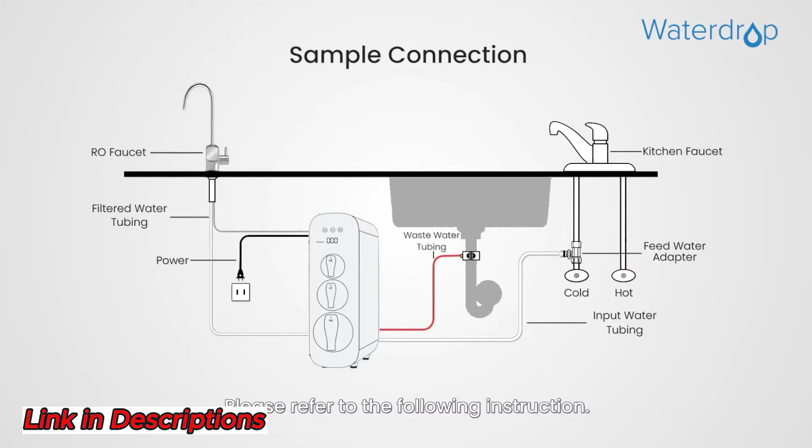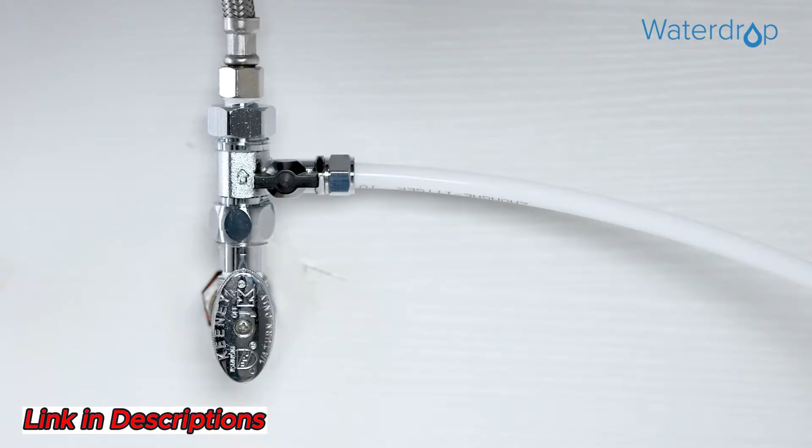Let's start with installing the feed water adapter. We have already connected the input water tubing with the feed water adapter for a smooth and easy installation.

Firstly, shut off the water supply and turn on the kitchen faucet to release the water pressure. Then disconnect the cold water pipe from the cold water supply valve.

Twist the feed water adapter onto the cold water supply valve with its washer and tighten it with an adjustable wrench. If your cold water pipe is 1/2 inch, you need to unscrew the two converters from the feed water adapter first, then twist the feed water adapter onto the cold water supply valve.

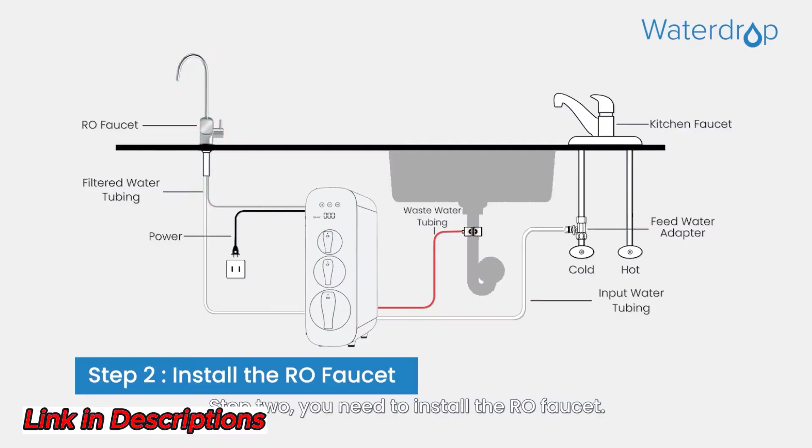At last, twist the cold water pipe with its washer onto the feed water adapter and tighten with an adjustable wrench. Step 2: install the RO faucet.

Firstly, insert the faucet spout into the faucet body. Then insert the faucet stem, power cord, and filtered water tubing into the hole on the countertop. Under the sink, slip on the nut and tighten it up. Next, tear off the protective film of the faucet.

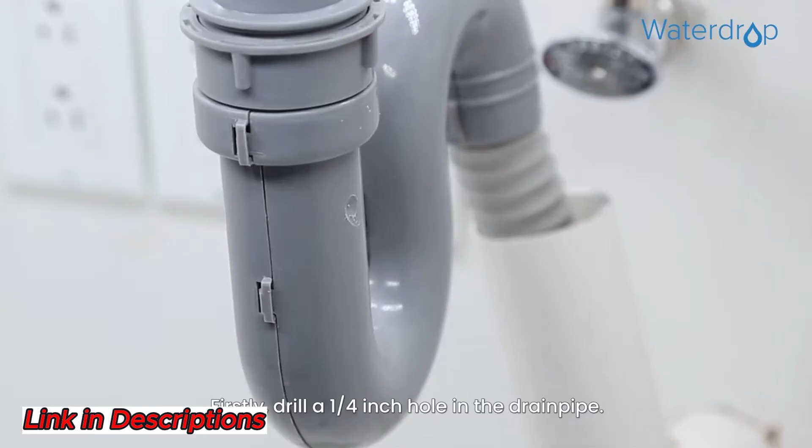Step 3: let's install the drain saddle. Firstly, drill a 1/4 inch hole in the drain pipe. Please don't penetrate the opposite side of the pipe.

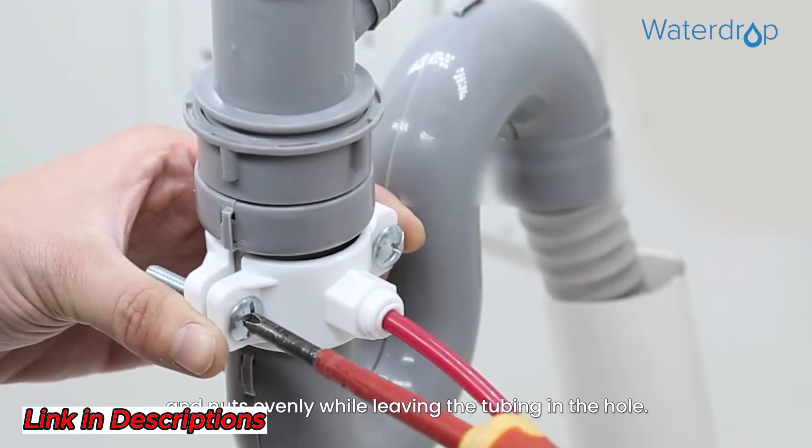Secondly, slip the front plate on one end of the tubing without a mark, and insert the tubing into the drilled hole for about 0.6 inch. Thirdly, position the back plate on the drain pipe by tightening the screws and nuts evenly while leaving the tubing in the hole. At last, pop the lock clip on the fitting to secure the connection.

Step 4: let's position the RO system housing. Before you position the system, check and ensure there is sufficient space under the countertop to install the system. Next, position the front panel facing toward you, which will be convenient for future replacement and indicator checking. We don't recommend placing the housing against the cabinet, as there may be vibrations when the system works.

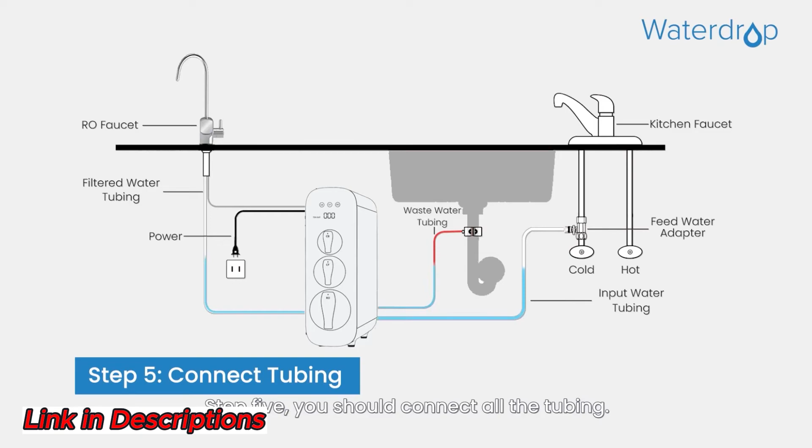Step 5: you should connect all the tubing. Let's start with installing the input water tubing. Firstly, remove the plug from the input water port and identify the white 3/8 inch tubing which has been attached to the feed water adapter.

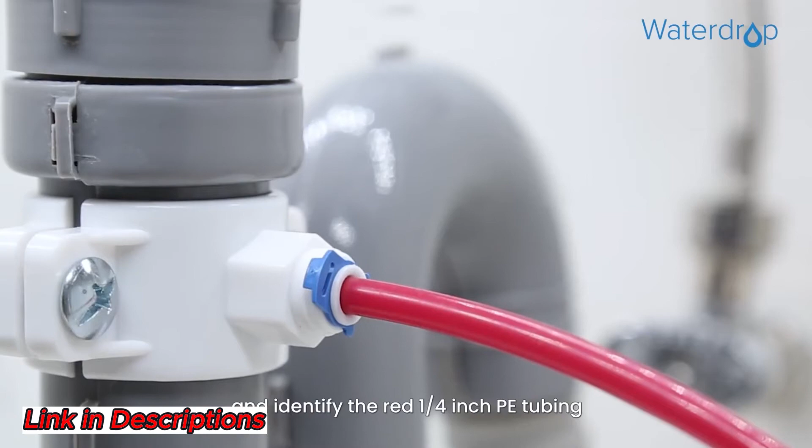In the end, you need to install the waste water tubing. Firstly, remove the plug from the waste water port and identify the red 1/4 inch PE tubing which has been attached to the drain saddle. At last, insert the other end of the tubing into the waste water port and pop the lock clip onto the fitting. After connection, make sure all tubing is fully inserted until you reach the mark on the tubing.

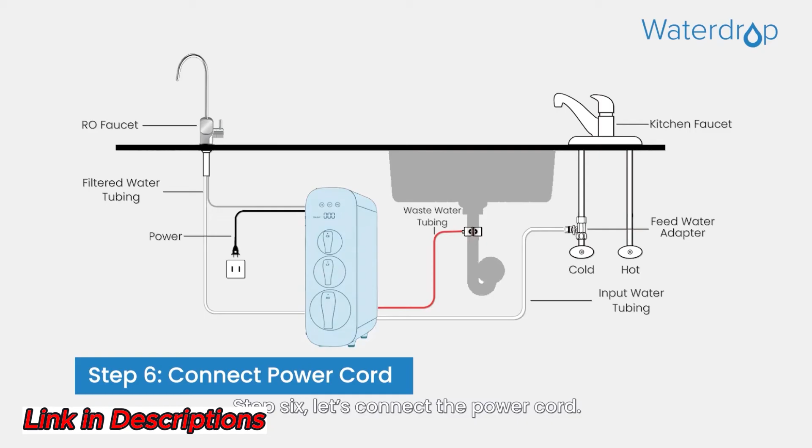Step 6: let's connect the power cord. Let's start with connecting the RO faucet to the system. Firstly, insert the power cord, which is attached to the RO faucet, into the faucet connector.

Then tighten the nut. In the end, you should connect the power adapter. Insert the DC head of the power adapter into the power port at the back of the housing.

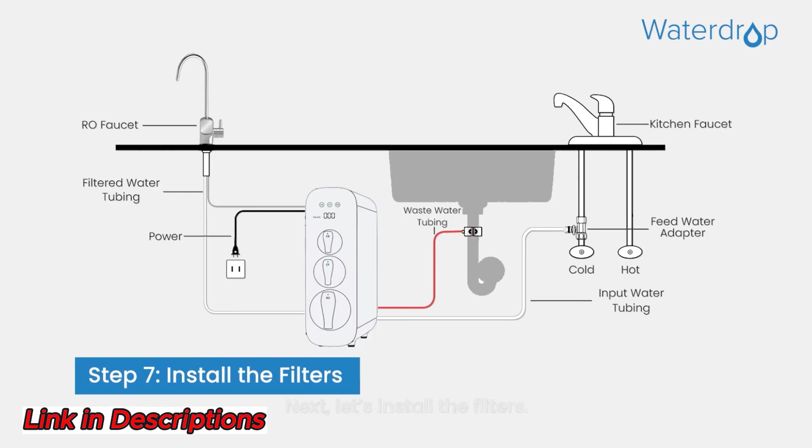Next, let's install the filters. Each filter is marked with a logo and an installation arrow. Insert the filter into its corresponding hole and align the arrow with the empty circle on the housing.

Then twist the filter with a little force forward in a clockwise direction for 90 degrees until the arrow is aligned with the solid circle on the housing. When the filter is fitted into place properly, you may hear a clicking sound. Now you have completed the installation of a filter.

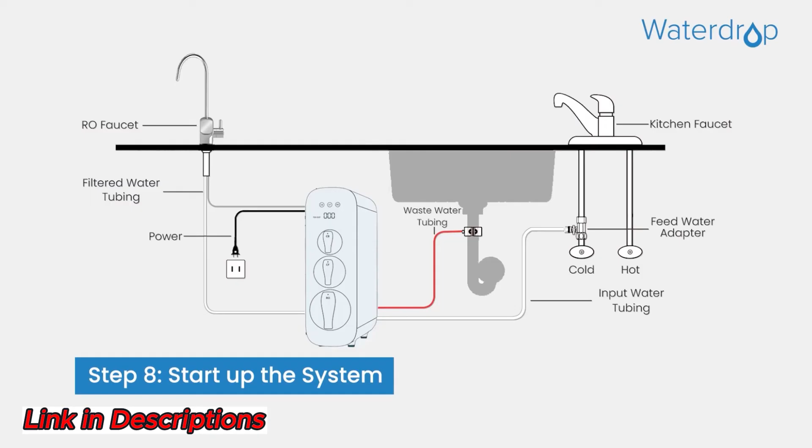Lastly, let's start up the system. Turn on the cold water supply valve and check for leaks. Then insert the plug of the power adapter into the socket.

After powering up, the system starts flushing automatically for 5 minutes. Next, turn on the RO faucet and allow it to run for 30 minutes until the front panel screen starts displaying a TDS reading. Before turning off the RO faucet, confirm the flushing is completed and there is no water leakage.

Congratulations! You have successfully installed the system. Please enjoy pure and crisp water with Waterdrop now.